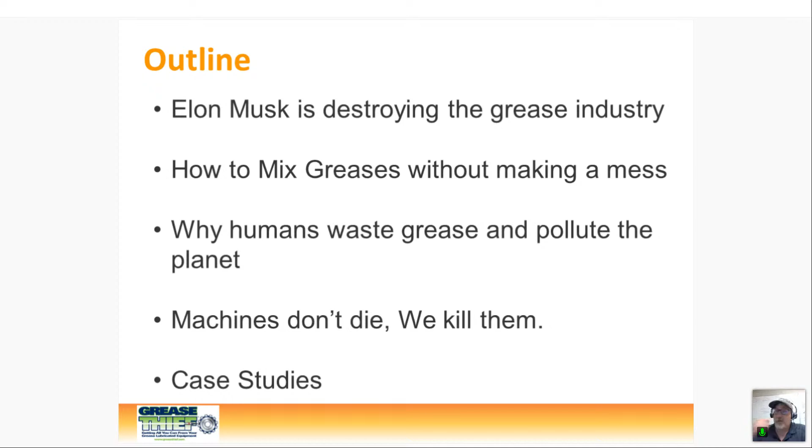I just finished watching a launch of SpaceX, and of course Elon Musk, the head of that organization, doing some really interesting things there. But I'm going to make the statement that Elon Musk is destroying the grease industry, and then I'm going to talk about how we could mix greases without making a mess, and why. What are the reasons behind us wasting grease and polluting the planet? My statement is machines don't die, we kill them, and a lot of times it's because of the way with which we approach our lubrication practices. So I'm going to talk about how we can avoid that and give some case study examples.

So when we talk about optimization and sustainability, we should really start with a picture of just how big this market is and what we're talking about with grease. I just got a copy of the 2021 summary from Lubes and Greases magazine, which does reference this material from NLGI.

You can see that here in North America, the grease consumption, production and consumption, is 373.9 million pounds of grease annually. And if we scope that up to the global figure, we're talking about 2.6 billion pounds of grease being produced and consumed.

You can see from these charts that the majority of these greases are lithium greases. Globally, we're talking about 51% being conventional lithium greases, and lithium complex greases comprising 21%. In the US, there's a skew toward lithium complex greases, but still a substantial amount, approaching 75%, or three quarters of the world's greases being lithium greases.

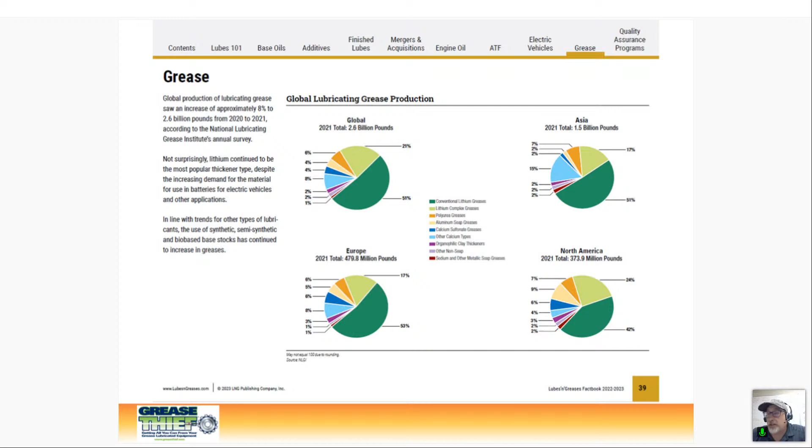So is it really a sustainable situation that we're in today with this heavy dependence on lithium for greases? I'm going to make the argument that it is not sustainable. Basically, Elon Musk has said Tesla will essentially need 100% of the world's lithium supply. How much does that leave over for grease? The answer is obviously zero.

So the choices are: we use 75% less grease, we basically reduce that grease, or we diversify. So we reduce the demand or we diversify into other products. So what can we do? Where can we transition to?

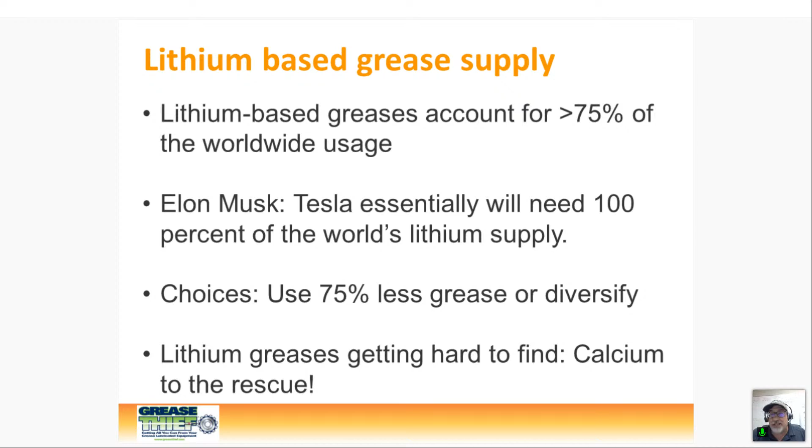Well, calcium could be one of those solutions. Calcium sulfonate complex greases do have some great advantages, and they don't have quite the demand issues that are pinching lithium as a grease solution. But if we do that, if we change—since 75% of the grease out there is lithium based, and we're going to lose our supply of lithium—then we have to switch to something else.

Grease, by its very nature, is designed to stay in the machine, to stick and stay where we put it, so it's not easy to get out. So as we go to alternative products that could be calcium sulfonate or some other grease, it raises this issue about how do we manage the billions, if not trillions of dollars of assets that are out there that are lubricated presently with some sort of lithium grease or something that we move away from. And so we can evaluate those mixtures that we know we have to create as we transition from one product to the next. Even if the greases are made with the same base oil and thickener type,

they may be incompatible. So that's something that we want to keep in mind. If the greases are incompatible, mixing could lead to significant changes. It could be changes in grease flow. It could be shear behavior. And bottom line is we end up with inadequate lubrication, and we threaten the condition of the grease lubricated machinery.

So here is a picture of a compatibility chart. A few folks out there have more recently taken to question these charts and even attack them. I just reposted something from Chuck Coe this past week where he called the compatibility charts dangerous, and they certainly are. And in a study I did a few years ago, I found 17 different compatibility charts, and none of them agree with each other. So we've got some issues, and this is not the place to go, not the place to start.

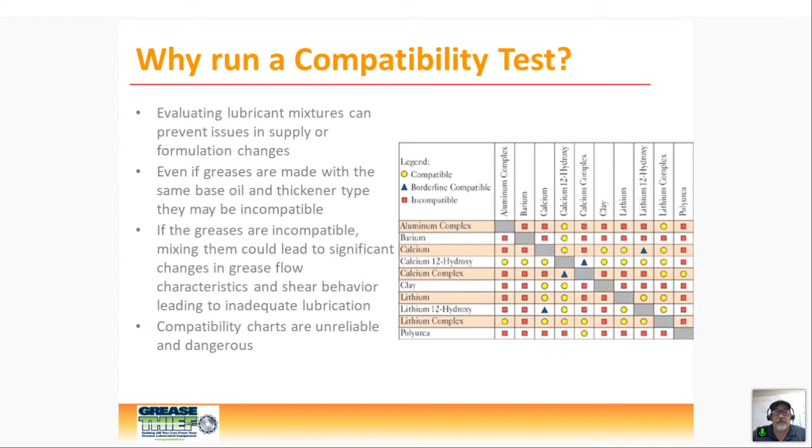So that's what a compatibility test can do for us. So if we know we have to switch from one product to another, we have to address that compatibility issue, and testing is really the way to do that.

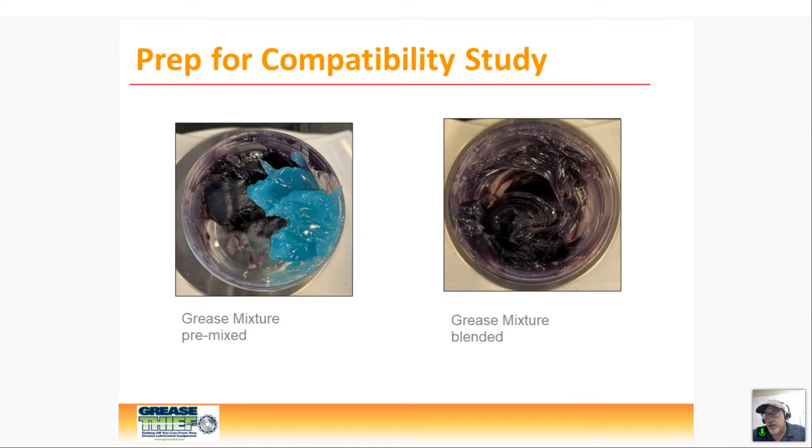So here's just a little bit shared stuff that we do in the lab here for the compatibility test. We start by taking a ratio of two different products. Here you can see that they have different colors. A lot of greases have colors; they're dyed, and that tells us basically what dye has been added to them, and that's about it. But it is helpful in being able to visually distinguish these greases. And so you can see we've got more of the darker grease than the lighter grease, and we get a mixture there that's blended together, and then we start testing that mixture.

There is a test for this, a standard, and it's an ASTM standard D6185. And this standard has you mix these different ratios together and then run a couple of tests, namely the cone penetration test and the dropping point test. There's another test in there, which is a storage stability test, which is also a cone penetration type test. And if you read the standard carefully, it says that these are just kind of the first level of testing, that typically you have to go beyond this into a second tier of testing to fully evaluate the compatibility.

Unfortunately, most folks will ask for this test to be performed. They'll get results just on the cone pen, the dropping point, and the storage stability, and they'll say, oh, it met the requirements, therefore they're compatible. And that's not what the standard says.

So there's a working group at ASTM that's working on this standard, that's submitting some alternative ways to approach that. Some of these methods being discussed include the methods that we're using here at MRG Labs. So I'll share that with you. We see these different baselines being tested, as well as these like 90-10 mixtures, sometimes 75-25, and then of course a 50-50 mixture that's going to see what happens as we transition from one product to the next.

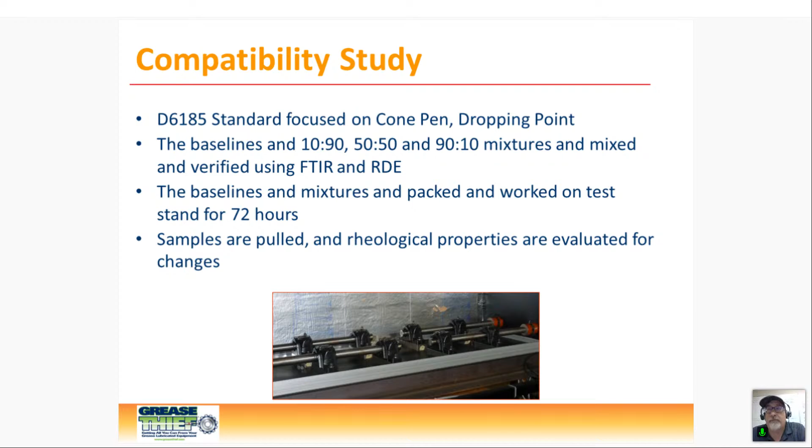So how is this helpful? A passing test can be very helpful for someone who has to switch over products. It might not just be about one machine; there may be a switch over that affects 100 machines. With these results, instead of having to create maintenance work activities to dig all that grease out of all those machines before putting the new grease in, we can say we've tested them, they're compatible, we're going to transition from A to B, and we're going to be good going forward. With that, there's also been an evaluation that the second grease is suitable for the application, with the appropriate base oil viscosity, type of oil, additives necessary, consistency, and so forth. So that's a pass.

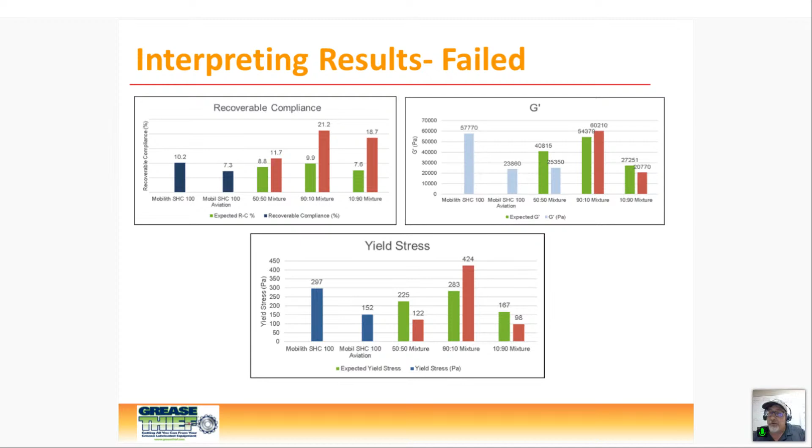In that case, the first grease looked like this. The second grease looked similar. They went on to a third grease, which looked a lot better, but still had some measurable change. As they finally got to their fourth grease, it looked something like this, and then they had a lot of confidence that they could move on with this critical component.

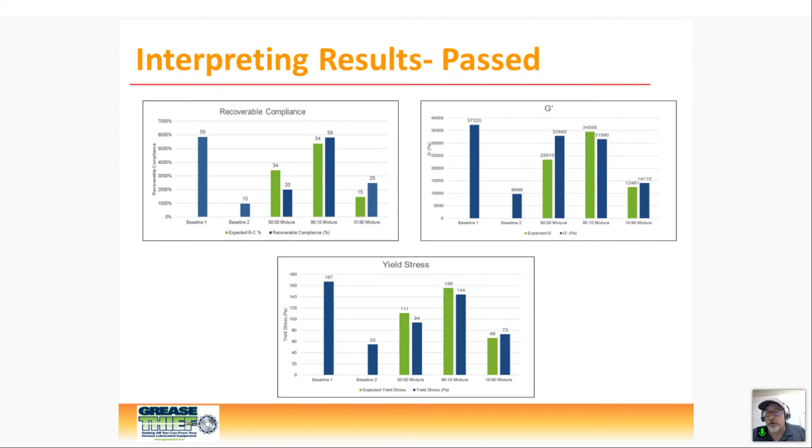So that's what the grease compatibility study can do for you.

So if we have this reality of a market that is going after the same materials we're using for greases, and it's inevitable that we're going to run out of lithium grease, that supply is going to be pinched off, we have to be thinking, how do we prepare for that coming transition? How do we have the confidence that the products we're going to use in place of it are going to be suitable, or at least know that they're not? We're going to have to plan around transitioning by completely changing bearings or completely tearing equipment apart, pulling end bells off of motors. All of that, if we're not prepared for it, we're setting ourselves up for failure.

So let's look at another component of the grease supply and this demand that's in the marketplace for lithium and other greases. And it comes down to the question of why are we replenishing grease? What are the reasons behind that?

One of the issues is about oxidation. Grease in machines, it could be in bearings, it could be on gear surfaces, what have you, but it's typically subjected to what we call oxidation stressors: heat, air, water, metal catalysts. These are all chemically attacking the oil to break it down through this mechanism of oxidation.

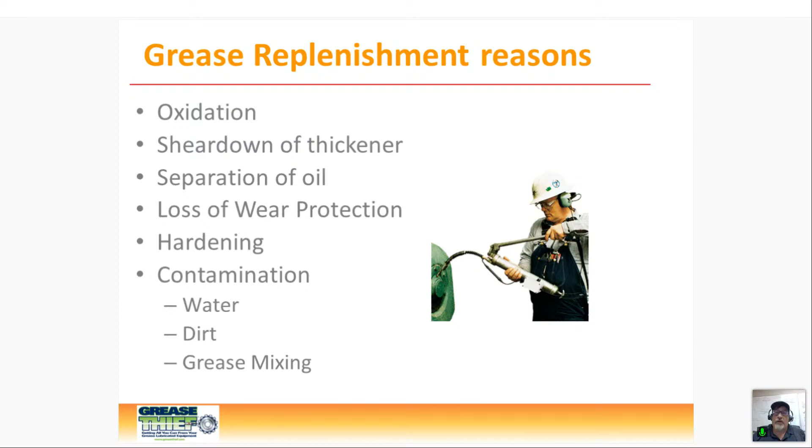The grease can harden over time. And then again, there's this flushing process of flushing out contaminants like water, dirt, and other contamination from grease mixing, or the wrong grease being there. So these might all be reasons that we would be replenishing the grease.

I'm going to make the statement that the default state of greasing is over greasing. Why is that? Well, if we are under greasing, whatever frequency has been adopted for an asset, if it turns out to be an inadequate quantity or it's added too infrequently to address the issues, what is the result? The results are very obvious. We end up with machine damage, a failure of the machinery, and a loss of function.

So the reaction to this under-grease state is to add grease more often, right? That critical machine failed. Someone says, find out what happened. They open it up, the grease is dried out or there's not enough there. Then they say, okay, grease it more often, you guys did not grease it enough. So the pendulum swings in the other direction.

Versus if we are in a default state of overgreasing, what are the symptoms? What are the consequences of that? Well, the machine overheats. It may continue to operate for a long time within some range, but it maybe isn't obvious that that machine doesn't need to operate that hot. Instead of being 160 degrees, it might be 165 or 170.

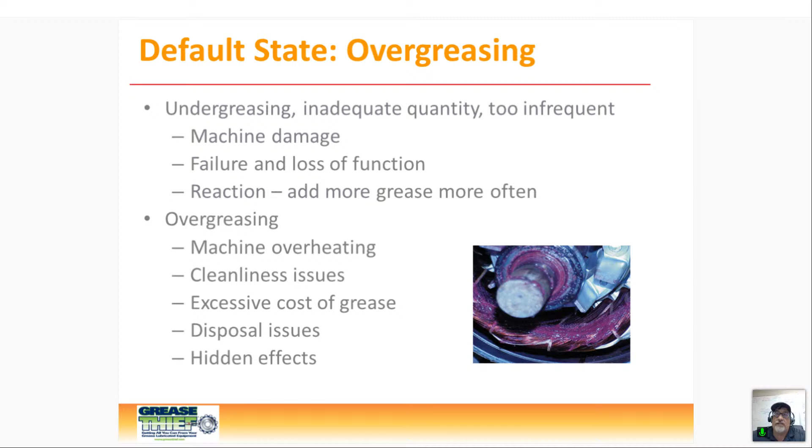So the bottom line is that undergreasing is obvious. You can't hide from that. It's not overlooked because you lose your process, you lose your machine. The reliability becomes a big issue. It drives us towards overgreasing. And I say that's the state we're in almost universally, unless we do something to find out what's optimal. What does the machine really need? If we can reduce the grease demand, we get ourselves out of some of these issues.

So we're in this state of overuse of grease. We're using more grease than we need to. If we can extend the grease life, we reduce the demand. Maybe it's hard to get our hands on the lithium grease supply now and in the coming months and years. But if we reduce our demand by 25, 35, 50 percent, then we're not trying to compete for that scarce resource.

This allows us to eliminate unnecessary lubrication. This goes to manpower issues. Boy, the manpower issues became really obvious during the COVID shutdown, when in some places I know they just suspended lubrication activities because they didn't have the people to come to the facility. But if we can eliminate unnecessary lubrication, that goes to labor.

We want to raise awareness of the impact of over-lubrication on cost and the planet. I want to go to another slide that I have here that's updating these figures, but there are emissions coefficients out there from the U.S. Department of Energy about lubricant, the way lubricants generate CO2. So we'll circle back to that.

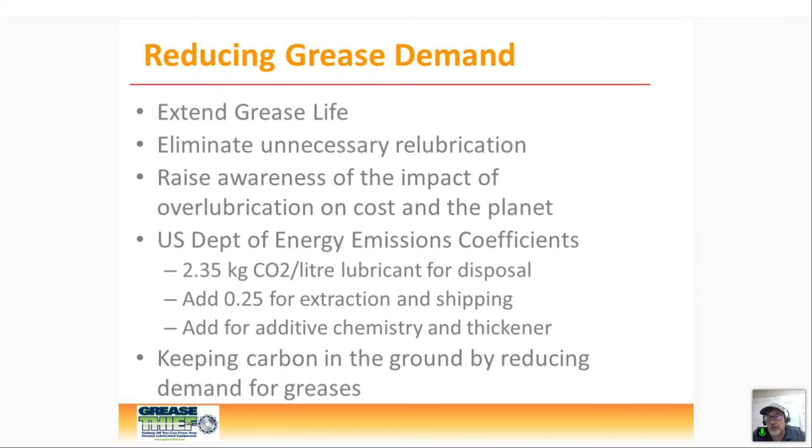But if we can keep carbon in the ground by reducing demand for greases, that's obviously going to have a positive impact. So here is what that carbon footprint looks like.

The coefficients from the Department of Energy are 2.35 kilograms of CO2 generated per liter of lubricant through that disposal cycle. There's an additional estimate I used from some of the same tables and charts of about 0.25 kilograms of CO2 per liter of grease for extraction and shipping. And then you have an additional amount for the additive chemistry and the thickener.

So for this meeting, I wanted to attack that last piece. We know that the additives, the exception could be molybdenum greases, where that could be substantial if we got into the carbon footprint of mining molybdenum and some of the 5, 6, 8% molybdenum greases that are out there. But I chose to focus on the majority of non-heavily additized greases, so I'm just focusing on the thickener in this case.

So I took an example, and that's dilithium adipate. That is recognized by the EPA as one of the highest CO2 producing chemical processes out there. Dilithium adipate is one of the feedstock chemicals used to create lithium greases, or the lithium soap to make lithium greases.

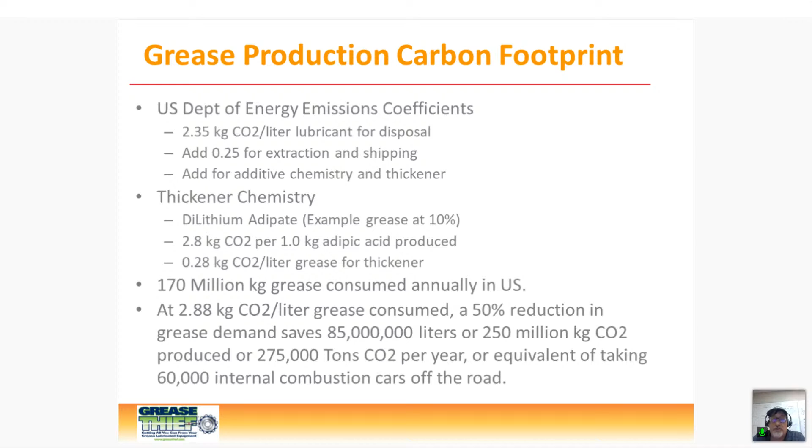But when we look at all of the impacts, including CO2 generated by the manufacturing, shipping, and usage process for greases, there's an opportunity to take some pretty significant credit there.

So if historically it was pump till you see it come out, right? The squeaky wheel gets the grease, right? Add grease if you have a problem. And the improved method is to have a lubrication round where you've got a number of pumps.

Yeah, 3 shots to do the trick. Tell that guy to pick up that grease gun and put 3 shots of grease wherever he sees a grease nipple. That's improved, but certainly not the best. And then you can get into precision greasing, where we have really valuable tools like a calibrated and clear grease gun where we know what our delivery rate is.

We've got color-coded products and fittings. We might even have grease meters that measure the flow of the grease so we know specifically how much we're adding, and then using barcodes, electronic rounds. All these things will drive us towards more uniformity in the greasing process.

Uniformity and less mistakes, but not necessarily optimization. Optimization comes about when we've taken measurements of our machines and understand what they truly need. And the first level of that is condition-based greasing that we get from using ultrasonic tools.

This is something that's really on the rise. I have a training class coming up with some folks in the ultrasound area, and they've said to me that whereas in the past a lot of their focus for ultrasonic transducers and these tools has been on things like reducing air leaks, it's now greasing. There's been a shift to look at this and try to get a handle on it. So it's a growing area.

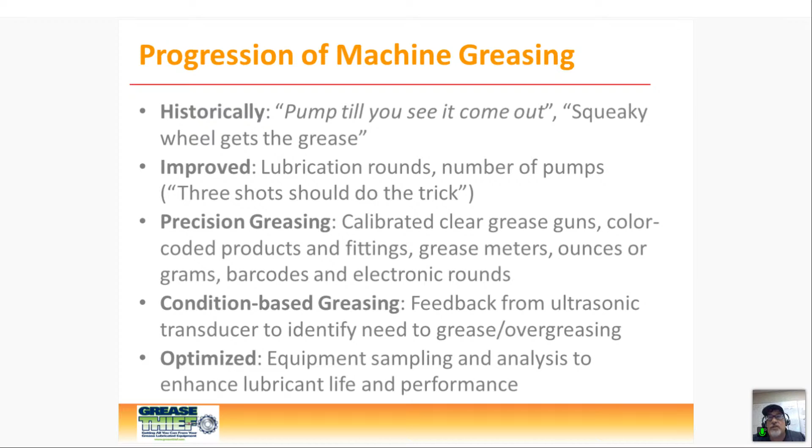So the next slide here - what are the factors ultimately that affect grease life? There's this tendency - the truth of the matter is our production facilities are designed by engineers, and engineers like to be able to design on the front end all aspects of operation, how we should operate it and so forth.

And the challenging part of greasing, lubrication in general, but greasing specifically, is that there are variables. And those variables may change. They may change from design conditions. They may change because an operator of machinery needs higher output, or has adopted a new technology, or is speeding up their process or slowing down their process. Anytime these things change, so do potentially the impacts on the grease itself and its effectiveness.

The factors that affect grease life include the type of machine it is - basically, what is the geometry of the contact surfaces where the grease is, how are they moving relative to the grease, how's the grease being moved or flung around, the machine speed. The faster the machine is moving, the more rapidly it's going through these cycles of working the grease and potentially shearing the grease. The operating temperature varies often, and as it does, so does the rate of oxidation, directly related to operating temperature.

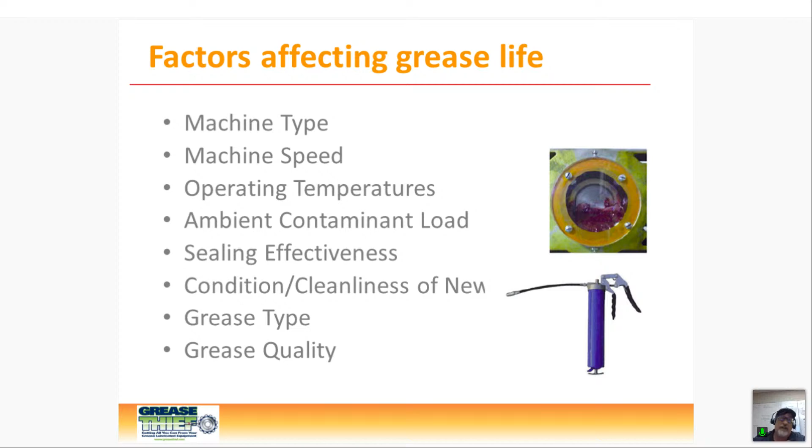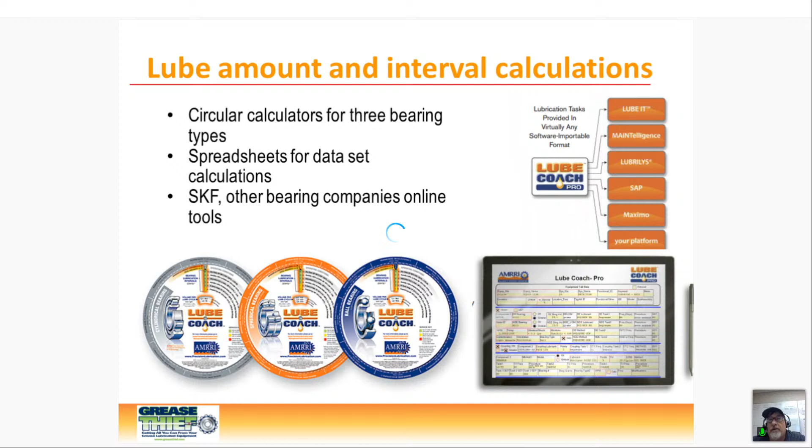There are some tools that can help us determine the lube amount and the interval calculators - spreadsheets we can use, apps for this, websites from some of the bearing manufacturers. AMRRI even has these Lube Coach circular cardboard tools that a lot of people enjoy having out in the field to do spot checks. They can be that next step to get a little bit better about what we're using. But when we step up to optimization, it requires that analysis.

So in order to do meaningful grease analysis, we have to start with good samples. There is an ASTM standard for this, ASTM D7718, the grease sampling standard. It's built upon a device called the Grease Thief, which helps us maintain a purge function with little or no back pressure when used in drains.

So you can see on this - Abby, you can help me, I'm not sure if my little pointer here is visible to the folks in the session - it's highlighted as the body open end on the left hand drawing. That's a threaded design of that fitting, and that can thread right into a machine. That's an 1/8 inch NPT. Oh, there you go. Yep, that's it exactly, Abby. Thank you.

It's an 1/8 inch NPT thread that threads into a lot of, say, medium-sized electric motors. It can also thread into the M10 size metric thread, so that works real nice. You can leave that in the machine and it catches the grease on its way out.

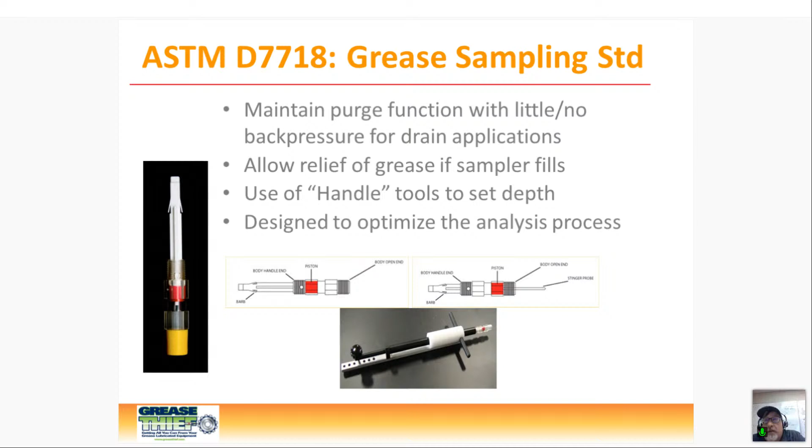Then you also have this stinger probe that you see on the right-hand side. That piece sticks out, and you can use it with a tool that allows you to go into the machine and feel when you contact that target surface, because we really want that grease to come from the location that has the information about the equipment and the condition of the grease.

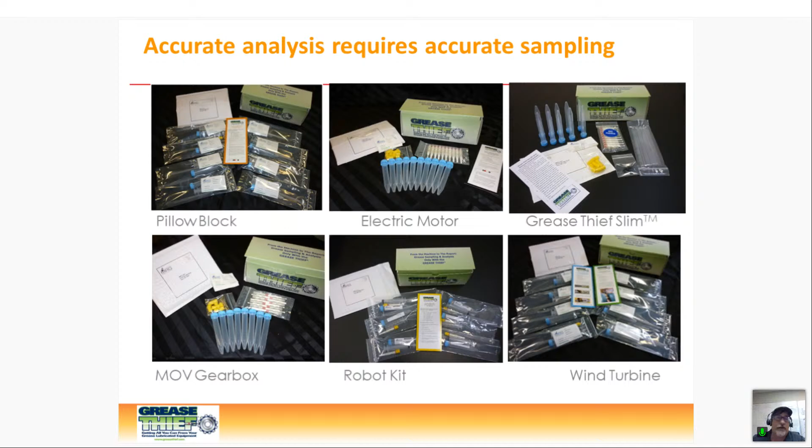So we have 6 different sampling kits shown here: the pillow block kit, the electric motor kit, the wind turbine kit, kits for robots, for gearboxes, and for motor operated valve gearboxes or other gearboxes. The pillow block kit is our go-to kit. We just came back from Ireland, and some folks there in food processing were asking about it, and we said, yeah, that's the place to start. You can take a sample right off the face of a pillow block bearing, or extract it from a lot of different machines as well.

But you start with the right tools and the right techniques, and then you move into the analysis piece, the ASTM D7918 standard, which shows you all the different things you can measure. Ferrous debris, for example, is measured by simply dropping the Grease Thief into this Poseidon Systems FerroQ device, which we've tested extensively and which represents the ferrous content whether it's homogeneously distributed or not. If you just have a couple of large particles in one area of the grease, as long as you're capturing them, it's going to measure them and represent them in a parts per million equivalency that allows us to create criteria, trend results, and find the outlier machines that need our attention.

We also have this die extrusion process, which squeezes the grease back out. This is really the only straightforward technique for determining changes in consistency for a volume of this size. We can do this with less than a gram of grease, whereas with cone penetration and some of these other tests, you're talking about hundreds of grams of grease. So we can really miniaturize this process, take it down to a very small target sample size, and still obtain that consistency information.

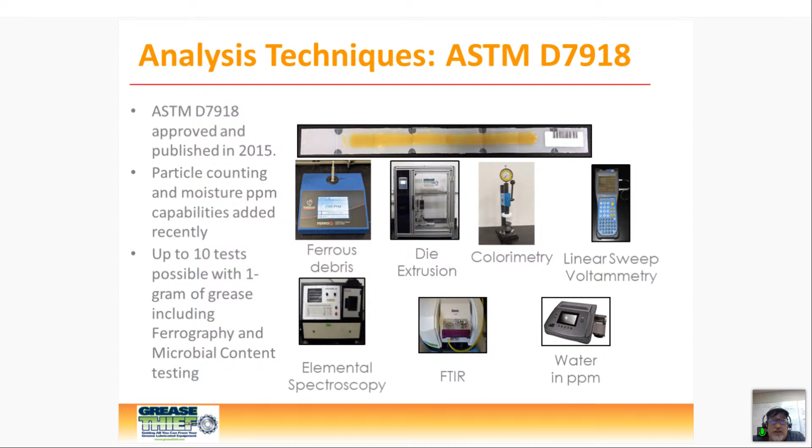Colorimetry becomes helpful in picking up mixing of greases. Linear sweep voltammetry looks at the antioxidants and how they deplete over time. The die extrusion and linear sweep voltammetry are really critical in optimizing grease replenishment frequencies. If the grease consistency has really dropped off, we have to be changing the grease before that point, so this allows us to dial that in. If the die extrusion values are consistent with new grease, if the linear sweep voltammetry shows significant remaining life in the grease, and you don't have an accumulation of particulate and water and so forth, then we might be able to extend grease life. I'll give you some case studies where we've been able to do exactly that.

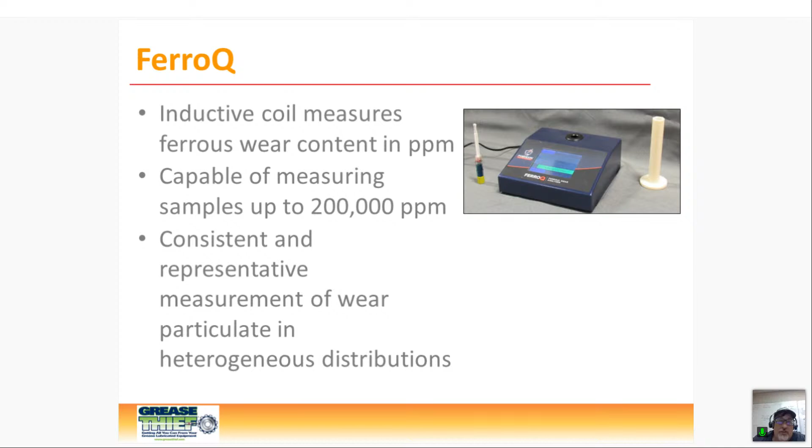Here's the FerroQ that I talked about. A reading of 200,000 ppm sounds kind of nutty to an oil analysis person. That's a really high concentration, but this happens in greases, especially when there's a problem, because grease is cumulative and there's nowhere for it to go. It's not being filtered out, it's not settling. So we really need to accurately measure up to those levels, with a consistent and representative measurement.

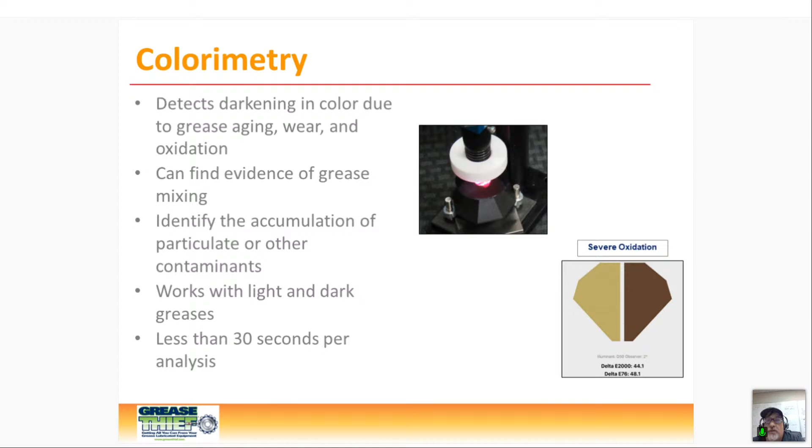The colorimetry is another valuable tool. We use it a lot for screening purposes. What we found is that the grease needs to be at a set thickness when you light it up, when you're trying to determine its color, because that color or visual indication can vary based on the thickness of the grease film. So we set that film, and then we can compare it to new grease. You can see an example of severe oxidation where a tan or cream colored grease has gotten quite dark due to being oxidized over some period of time in service.

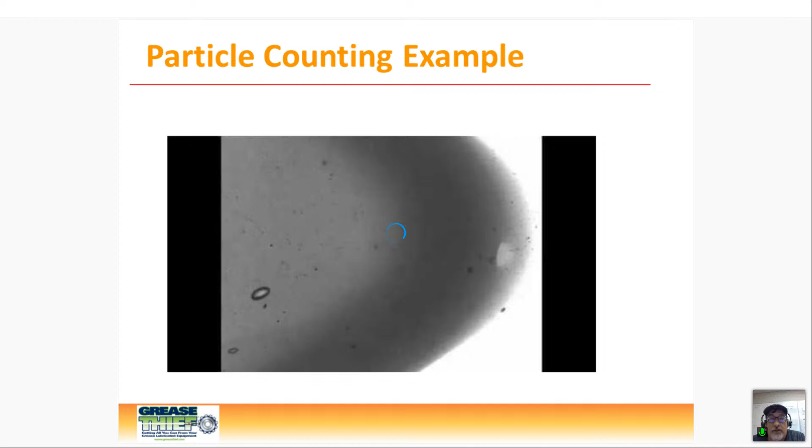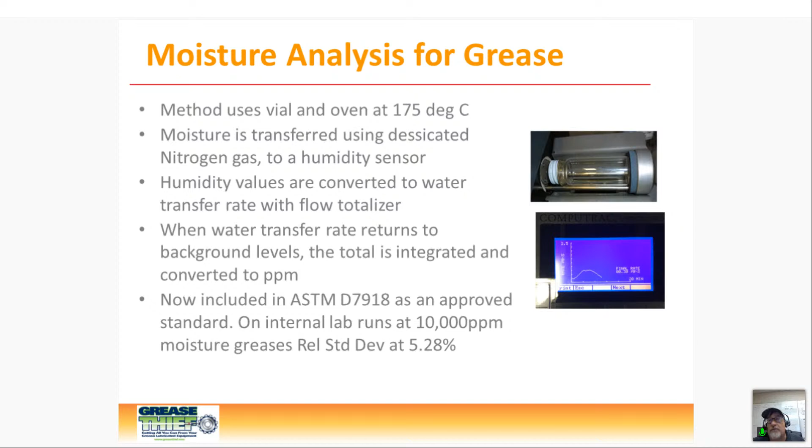Then we have the moisture analysis for grease. It sounds pretty straightforward, everybody can do it for water, but it's tricky for grease because water can hide in grease in a kind of clump. So we've developed a method where we take a thin film of grease coming out of the die extrusion process and use this Vapor Pro device that uses a humidity sensor and heats that thin layer up, drives the moisture off, takes that in a dry carrier gas to the humidity sensor, turns that into parts per million. We've seen we can measure up to 10,000 ppm moisture in greases with a relative standard deviation of around 5%, so very repeatable and accurate in terms of the moisture levels present.

Let's finish up with a couple of case studies. The first is from helicopter sampling - a specialized grease sampling kit developed for helicopter applications, the hanger bearings, the swash plates, the splines found in these drive lines. The grease analysis data was used to change the maintenance intervals. This is an aircraft developed in the early 1960s, so 60 years of operating history. Over that time there was the initial guesswork of engineers - pretty good, because this airframe is still out there.

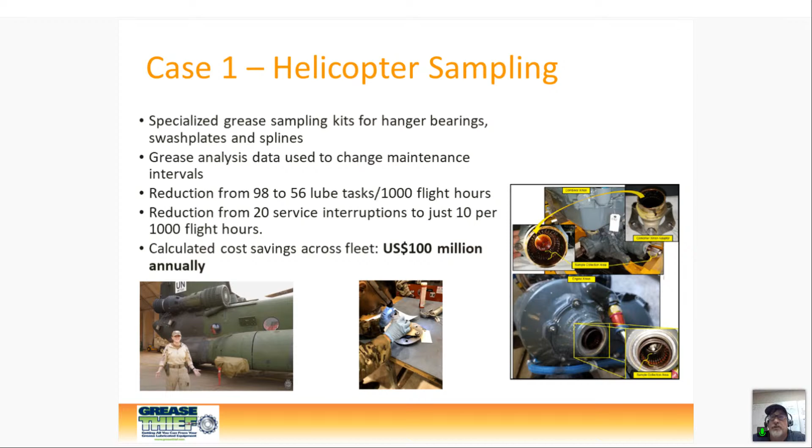But you change over time if there have been discovered discrepancies with the grease, maybe even some accidents or near misses, and you end up defaulting to over-greasing, as we said at the beginning. So over 60 years of maintenance, these helicopters were being taken in every 50 flight hours for relubrication at some locations. This study allowed us to reduce the total number of lube tasks from 98 to just 56 for every 1,000 flight hours - almost cutting the tasks in half, reducing the number of service interruptions in half, keeping it out in the field able to perform its mission, and calculating a cost savings across that fleet of $100 million annually. Keep that 50% figure in mind.

We almost cut the grease in half. Here are the factors that went into this - how do we build that condition-based grease optimization? It's by creating the values that drive the end of life: accumulation of wear, consistency changes through die extrusion, the presence of different types of metals, particles coming from sand and dirt, and moisture levels. A lot of this was being driven by the oxidation index, some by changes in the consistency of the grease, and some by the accumulation of water.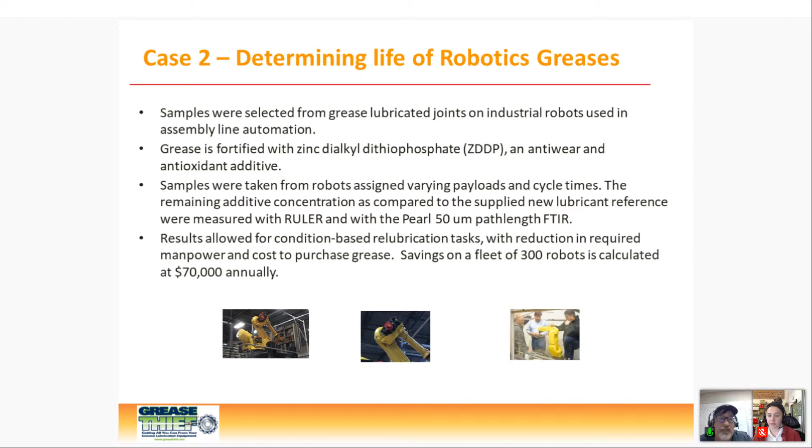In this case, we saw a fairly significant reduction in grease requirements. Savings on a fleet of 300 robots was calculated at $70,000 being saved annually.

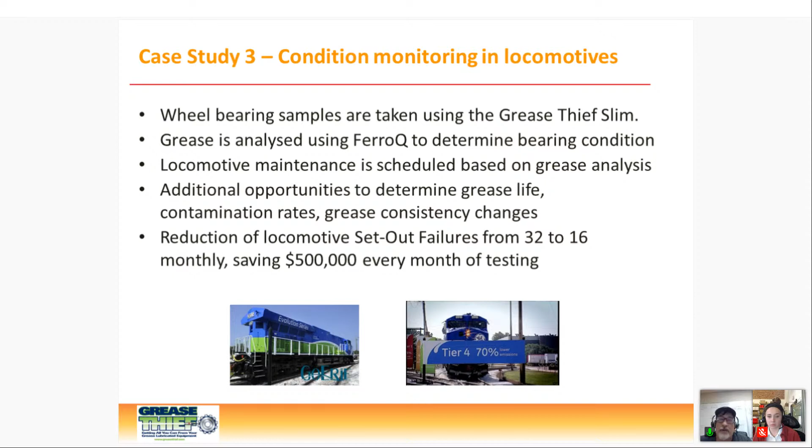The third example is condition monitoring in locomotives - wheel bearing samples, taking samples with that grease thief slim we showed, using the FerroQ to determine bearing condition, and setting locomotive maintenance based on grease analysis. There are other opportunities for determining grease life and consistency changes, but again, cutting in half the number of failures every month, saving $500,000 on grease testing.

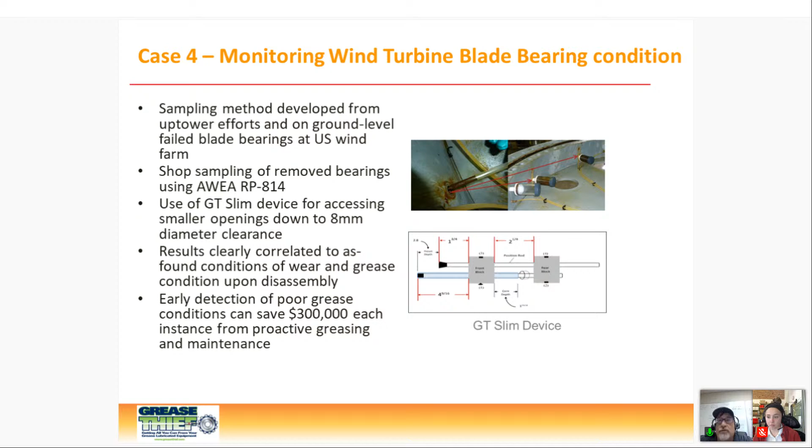Just to finish up, when we talk about sustainability, I led with grease allowing us to have a data-based decision process to move from what's probably, and all my examples back this up, an over lubrication situation to an optimal lubrication. When we move from excessive use of resources to optimized use, we're reducing demand, reducing the labor component, and reducing the carbon footprint.

So we can conserve energy with optimal viscosity, conserve natural resources through condition-based grease replenishment, and extend equipment life. If machines last longer, we don't have to replace them with new machines as often. We reduce waste by reducing grease consumption so waste streams get smaller. We get a greater return on net assets, which is an economically sound process, and enhanced safety for everybody involved. These are all straight out of the sustainability guidelines from the UN.

So, Abby, that's what I wanted to share today. I know you, as the younger generation, are doing a great job staying focused on issues like the planet and sustainability, and I wanted to bring that message into this space and share it with folks today. How did I do?

Yeah, thanks so much, Rich. It was great to hear. It's definitely something applicable across all industries, so it's great to hear how sustainability is focused in the industry of grease lubrication for machinery and all that kind of stuff. That was really great.